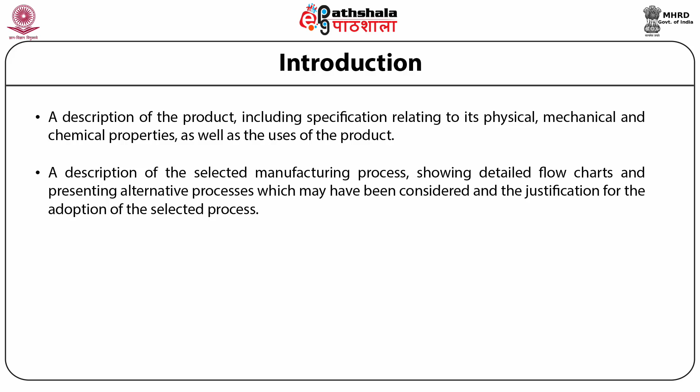A determination of the plant size and the production schedule. Selection of machinery and equipment.

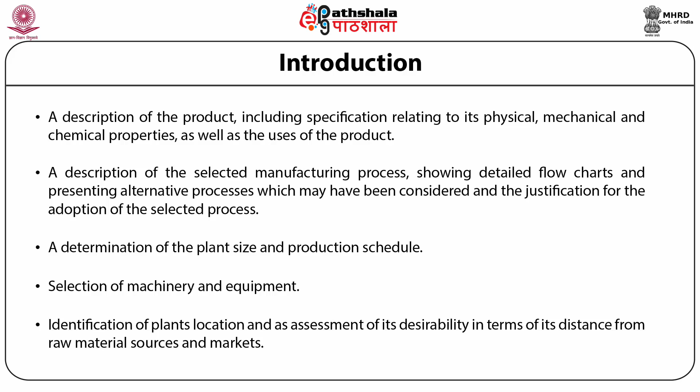Identification of plant location and assessment of its desirability in terms of its distance from raw material sources and markets. A design of the plant layout and an estimate of the cost of erection of the proposed buildings and land improvements.

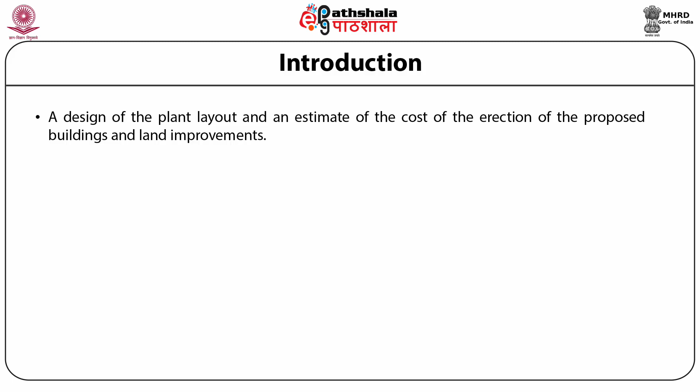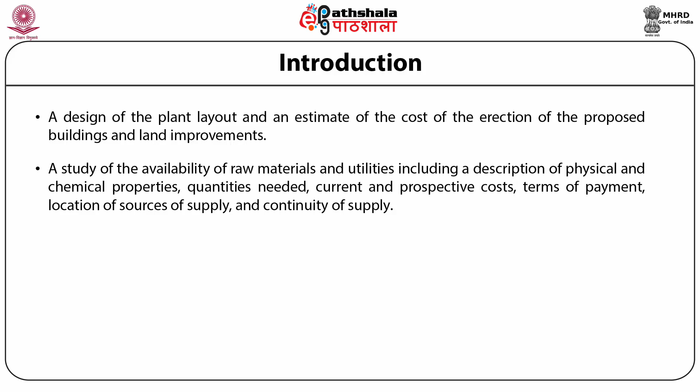A study of the availability of raw materials and utilities, including a description of physical and chemical properties, quantities needed, current and prospective costs, terms of payment, location of sources of supply, and continuity of supply.

An estimate of labor requirements, including a detailed breakdown of direct and indirect labor requirement, and the supervision required for the manufacture of the product.

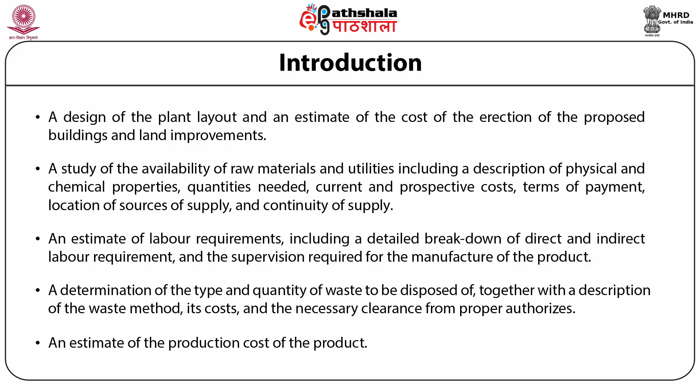A determination of the type and quantity of waste to be disposed of, together with a description of the waste method, its costs, and the necessary clearance from proper authorities. An estimate of the production cost of the product.

Technical appraisal: technical feasibility assesses the technical viability for coming to a conclusion as to whether it fulfills the expected norms or not. Technical appraisal involves the critical study of the following aspects: material inputs and utilities.

This aspect is concerned with defining the materials and utilities required, specifying their properties in detail, and setting up their supply program. Material inputs and utilities may be classified into four broad categories: raw materials, processed industrial materials and components, auxiliary materials and factory supply, and utilities.

Raw materials may be full or semi-processed. They can be further grouped into agricultural products, mineral products, livestock and forest products, and marine products.

Processed industrial material and components represent important inputs for a number of industries that include base metals, semi-processed materials, manufactured parts, components, and sub-assemblies. To get authentic and sufficient information, answers to the following questions must be sought.

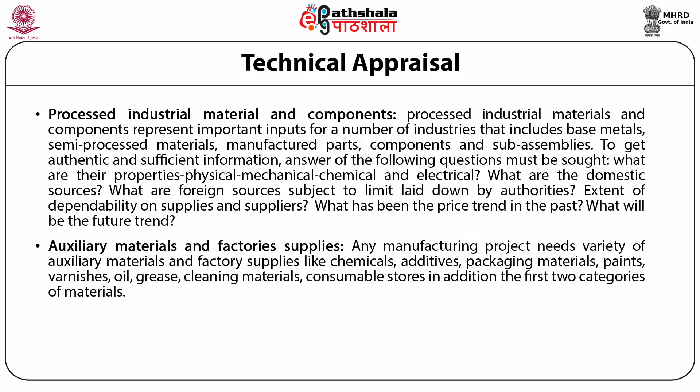Auxiliary materials and factory supply: any manufacturing project needs a variety of auxiliary materials and factory supplies like chemicals, additives, packaging materials, paints, varnishes, oil, grease, cleaning materials, and consumable stores, in addition to the first two categories of materials.

Utilities. Utilities stand for power, water, steam, and fuel, gas, which play a constructive role in converting raw materials into end products. Correct assessment of these in terms of location, technology, plant capacity, and the like is a must. These utilities turn critical at times and become a limiting factor in achieving the highest level of efficiency or the lowest level of cost.

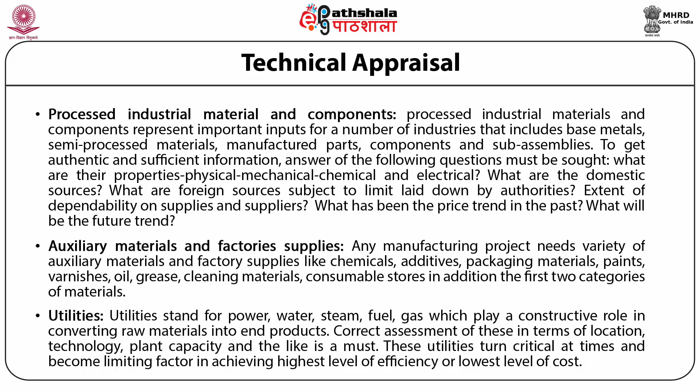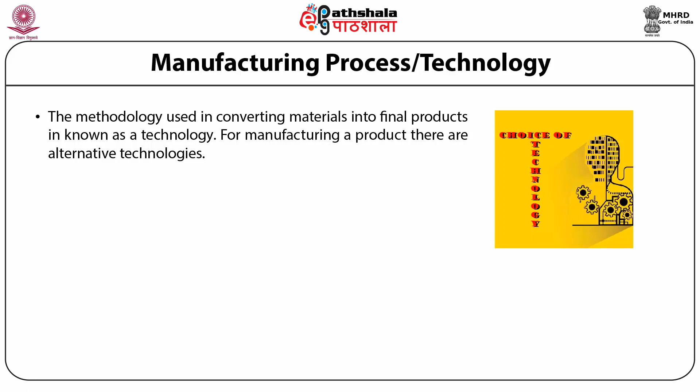Manufacturing process or technology is the methodology used in converting materials into final products. For manufacturing a product, there are alternative technologies. To manufacture steel, either the open hearth process or Bessemer process can be used. That represents a technology. In making cement, the possible processes are wet or dry.

These technologies are always changing from good to better and from better to best. Even what is today the best can be superseded in case something better than the best is made available. Research and development efforts make the best possible, because even the very best can be improved upon over a period of time.

Feasibility study, especially technical feasibility, is to focus its attention on the significant aspects of choice of technology, acquisition of technology, and the appropriateness of the technology.

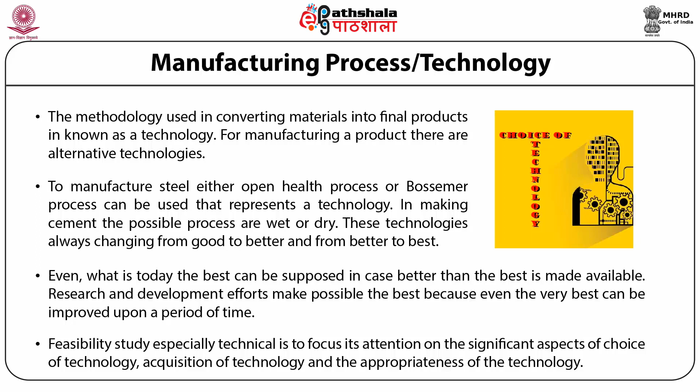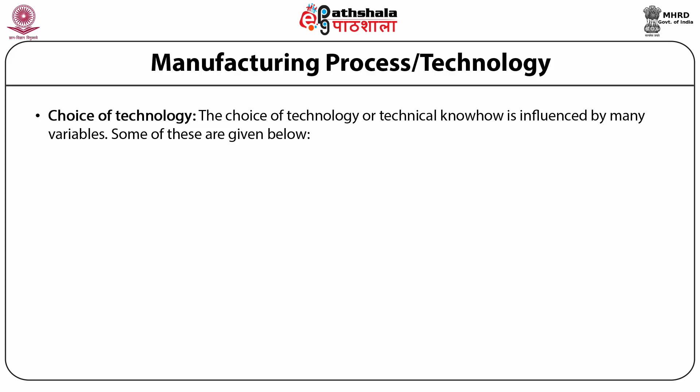Choice of technology: the choice of technology or technical know-how is influenced by many variables. Some of these are plant capacity. Plant capacity and manufacturing technology are closely related with one another. In order to meet a given plant capacity requirement, only a specific production technology may be viable.

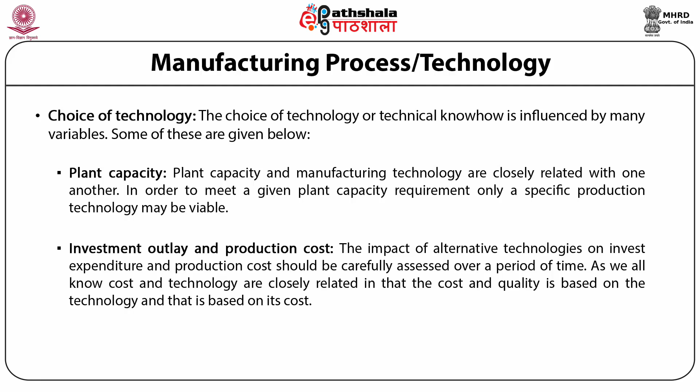Investment outlay and production cost: the impact of alternative technologies on investment expenditure and production cost should be carefully assessed over a period of time. As we all know, cost and technology are closely related, in that the cost and quality is based on technology, and that technology is based on its cost.

Major inputs: basic inputs play a significant role in choosing a manufacturing technology. For example, in the manufacturing of cement, the quality of limestone decides whether the manufacturing unit should go in for wet or dry processing.

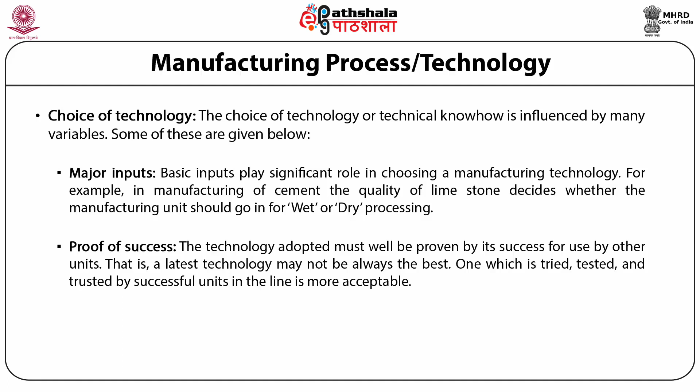Proof of success: the technology adopted must be well proven by its success for use by other units. That is, the latest technology may not always be the best. One which is tried, tested, and trusted by successful units in the line is more acceptable.

Latest advancement: the technology adopted is one which is the latest, or which is adaptable for updating easily with least cost and time. The product mix.

Product mix stands for the main products, co-products, and byproducts that result from use of a particular technology.

Ease of absorption: technology, however latest and effective, has no meaning unless it is easily absorbed by the company. Very often, it so happens that high-level technology may not easily percolate to the absorbing firm due to some reason or reasons.

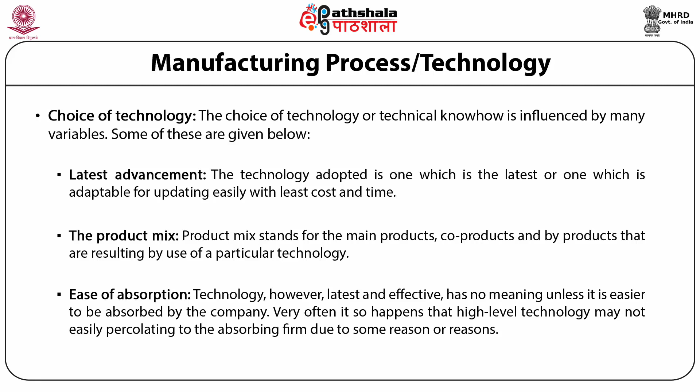Acquiring technology: if technology is available openly, then the detailed information can be obtained even at the feasibility stage. In case the know-how is available with the owner, this step, that is evaluation of process, can altogether be eliminated. And if the know-how is not available with the owner, it has to be acquired from outside sources such as foreign collaborators, consultancy organizations, machinery suppliers, promoters' knowledge and experience, and recruitment of suitable personnel.

The acquisition of technology from some other enterprise may be possible through technology licensing. This is the most popular way of acquiring technology. Under this arrangement, the technology license gives the licensee the right to use the patented technology and get the concerned know-how on a mutually agreed basis.

The supplier of technology generally provides a technology package which may consist of some components which are not essential. Therefore, it becomes essential to break the package into component parts, such as technology, process engineering services, supply of intermediate products, and supply of equipment by the licensor, use of the trade name, among other things. Every effort should be made to acquire only the essential and matching components of the technology package.

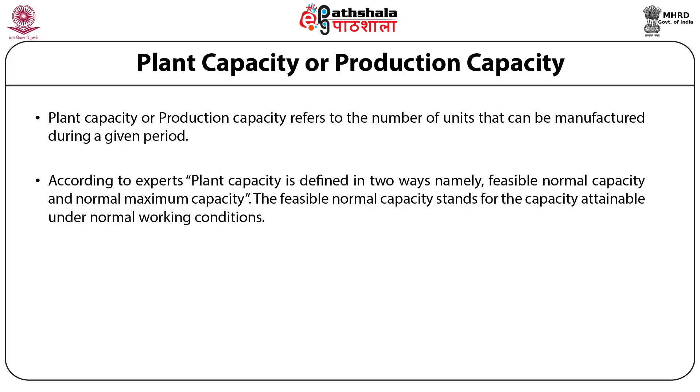The feasible normal capacity stands for the capacity attainable under normal working conditions. This is established on the basis of installed capacity, technical conditions of the plant, normal stoppages, downtime for maintenance and tool changes, holidays, and shift patterns.

Whereas normal maximum capacity is the capacity which is technically attainable, and this normally corresponds to the installed capacity guaranteed by the supplier of the plant.

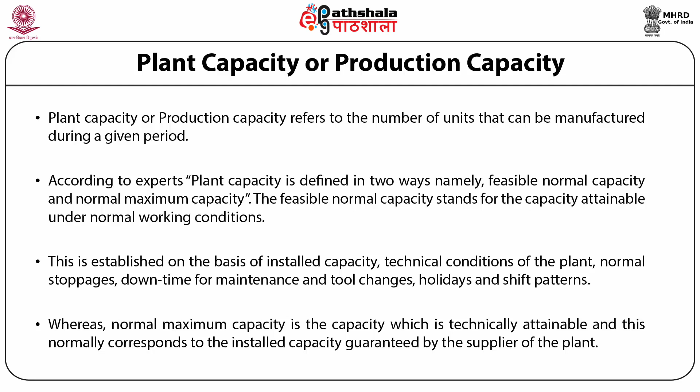Manpower. Requirement of manpower of different skills, both for construction stage and operational stage, should be assessed based on phasing of project execution and completion. The requirement of people should be assessed category, operation, and function wise.

The assistance of a consultancy company for recruitment of staff with the desired skills and qualification may be sought if needed. The objective should be to ensure the availability of adequate manpower for future operation and to avoid overstaffing at any stage of project execution.

Adequate provision of funds for the training of key personnel with a time-bound program should be estimated beforehand. The introduction of a scheme of productivity linked incentive or bonus may be kept in mind.

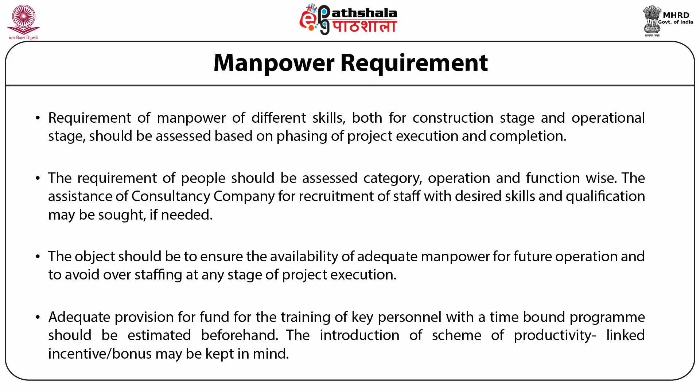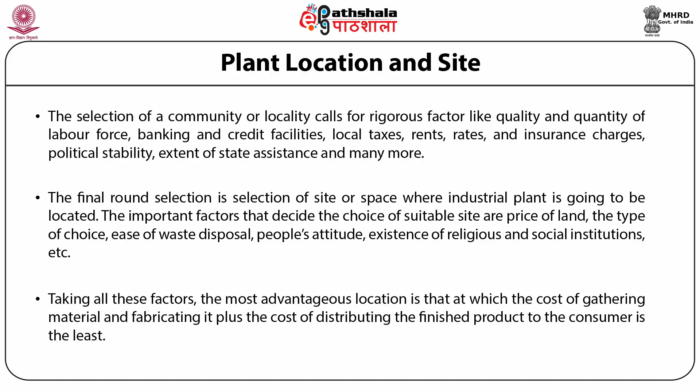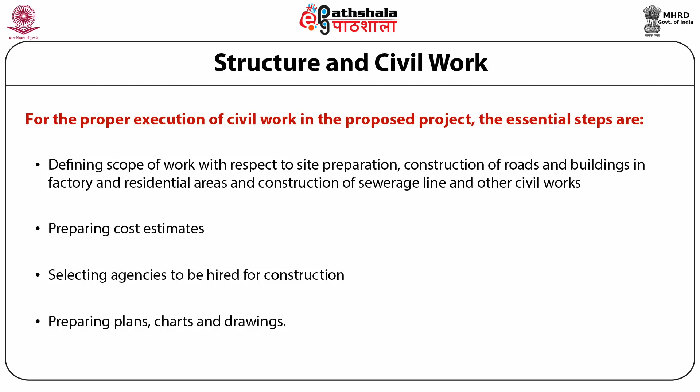Civil work can be further divided. Site preparation and development involves a set of activities: grading and leveling of site, demolition and removal of existing unwanted structures, relocation of existing pipelines, cables, roads, power lines, reclamation of swamps and draining and removal of stagnant water, connection of utilities from the site to the public network, electric power both high tension and low tension.

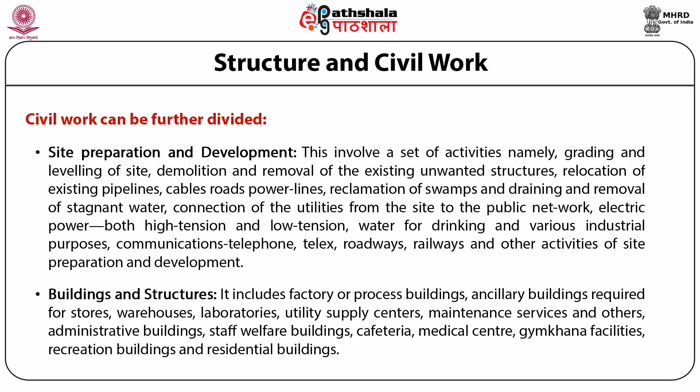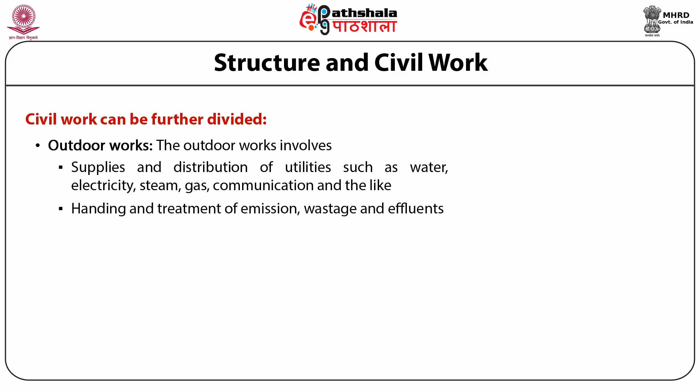Outdoor works involve supplies and distribution of utilities such as water, electricity, steam, gas, communication, and the like. Handling and treatment of emission, wastage, and effluents.

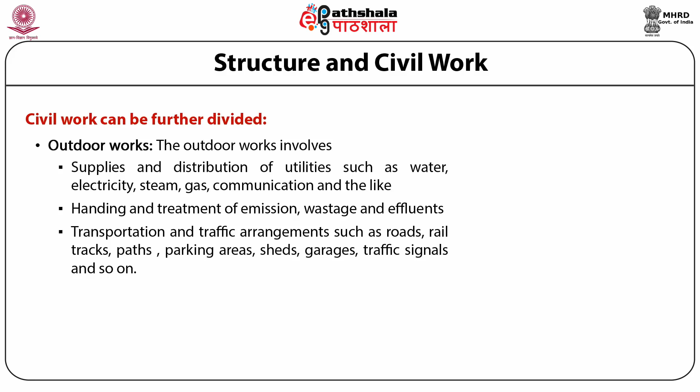Transportation and traffic arrangements such as roads, rail tracks, paths, parking areas, sheds, garages, traffic signals, and so on. Outdoor lighting, landscaping, and enclosure and supervision that include boundary wall, fencing barriers, gates, doors, security posts, sewerage openings, and the like.

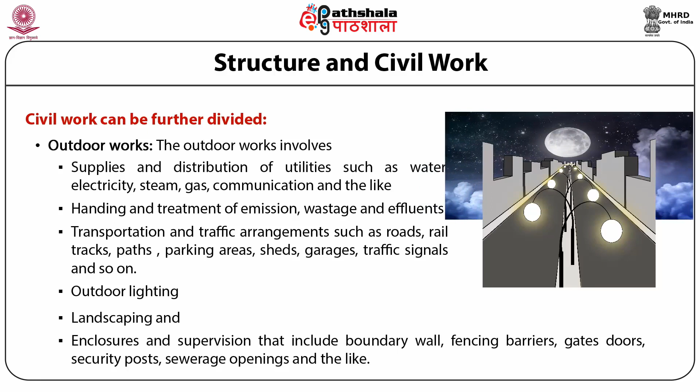Project charts and layouts. When data is collected on major dimension of project, that is on market size, plant capacity, production technology, machines and equipments, building and civil works, then project chart and layouts are prepared. These charts and layouts define the scope of the project and provide the basis for detailed project engineering and estimation of investment and production costs.

General functional layout, transport, utility consumption, communication, organization, plant material flow, and production line diagram are the major charts and layouts. General function layout shows the general relationship between equipments, building, and civil work.

Utility consumption diagram shows the principal consumption points of utilities and their required qualities and quantities. Transport layouts show the distances and means of transport outside the production line.

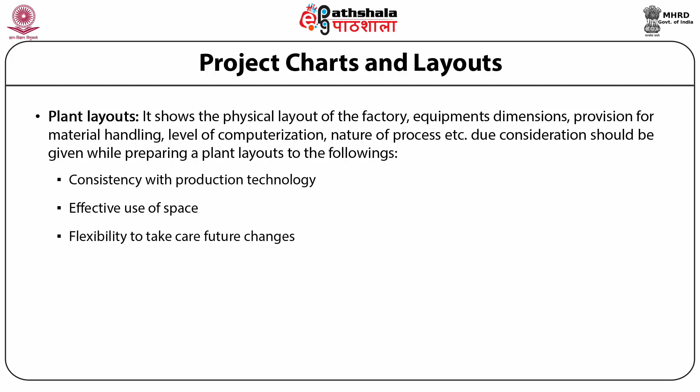Due consideration should be given while preparing a plant layout to the following: consistency with production technology, effective use of space, and flexibility to take care of future changes.

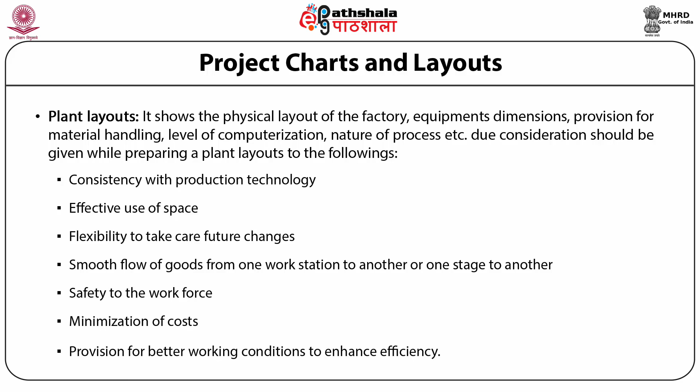Smooth flow of goods from one workstation to another or one stage to another, safety to the workforce, minimization of costs, and provision for better working conditions to enhance efficiency.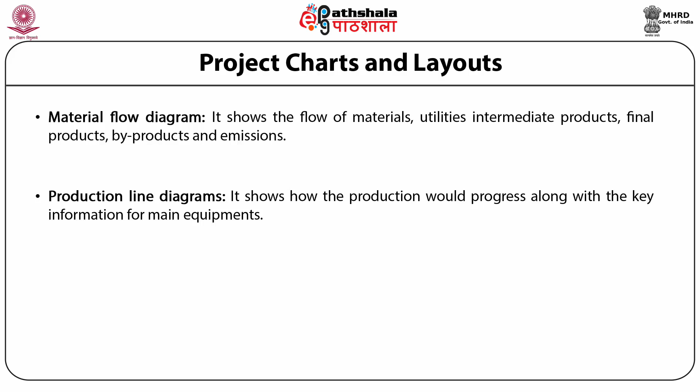Material flow diagram shows flow of materials, utilities, intermediate products, final products, byproducts, and emissions. Production line diagrams show how the production would progress along with the key information for main equipments.

Organizational layouts show the organizational setup of the project along with the information on personnel required for various departments and their interrelationship, even reaching grassroots level of each work position.

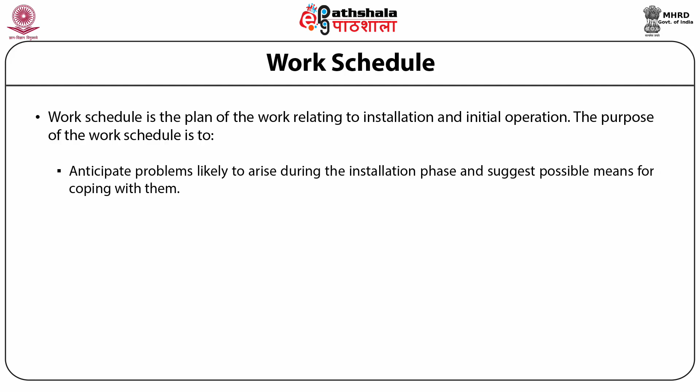Work schedule is the plan of the work relating to installation and initial operation. The purpose of the work schedule is to anticipate problems likely to arise during the installation phase and suggest possible means for coping with them.

Establish the phasing of investments, taking into account the availability of finances, and develop a plan of operations covering the initial period.

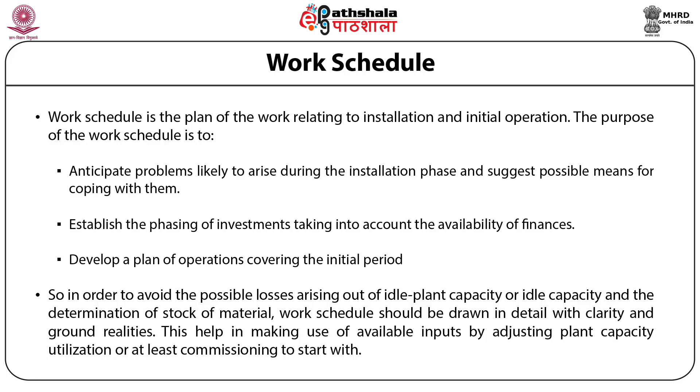So, in order to avoid the possible losses arising out of idle plant capacity and the determination of stock material, work schedule should be drawn in detail with clarity and ground realities. This helps in making use of available inputs by adjusting plant capacity utilization or at least commissioning to start with.

So students, let's now summarize what we have learned in this module. Project appraisal is the assessment of a project in terms of economic, social, commercial, ecological, and financial viability.

The technical feasibility assesses the technical viability for coming to a conclusion as to whether it fulfills the expected norms or not. Technical analysis seeks to determine whether the prerequisites for successful commissioning of the project have been considered and reasonably good choices have been made with respect to location, size, etc.

It is carried out to measure whether the project is technically sound and viable. Technical analysis of a project is very essential to ensure that the necessary physical facilities required for production will be sufficient and the best possible alternative is selected to procure them.

So, technical appraisal plays a very crucial role in acceptance or rejection of a project because a project which is not technically viable will not be financed by the lending institutions.